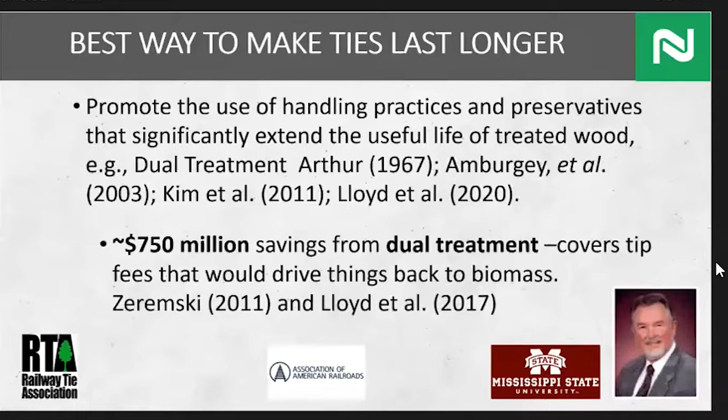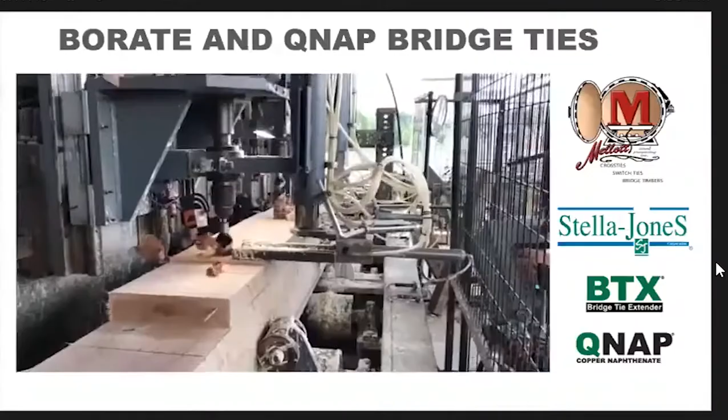And in this process, you can see the commercialization of this BTX program on bridge timbers by Nisus. This work is being done at a Stella Jones plant. So you can see they're drilling the hole in this bridge timber, and it is nominally going to be 1/2 an inch deeper than half of the thickness of the tie. So if you have a 10-inch bridge timber, you're going to drill 5.5 inches deep. You drill the hole, fill that hole with a borate solution, and then cap it.

So in the Boultonization process, the treatment process of this tie, in that last picture that went away a lot faster than the other ones did, all the red that you saw in there, back up for me and go forward again.

So if you take note, I know we're going through this again, if you take note of the red around the holes and the diffusion that has taken place in the Boultonization process of that borate inside that tie due to drilling these holes. Now, we've done numerous studies with University of Tennessee and with Stella Jones and at our plant as well, even on break testing and the strength of these ties after these holes were drilled, and we have not had a

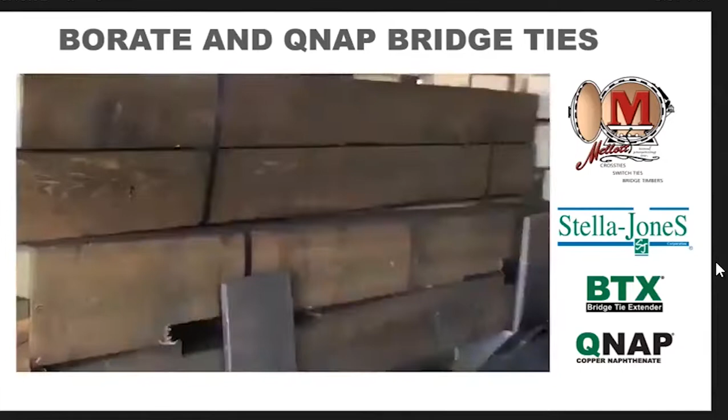problem with it. Then you can see it's going into the cylinder, and these were treated with QNAP here. It's wiped clean. Process is complete. There's the red that I was talking about in a different species of ties. So good diffusion through the Boultonization of doing the treatment through the BTX program that we have commercialized.

Problem with these ties is the dual treatment process was not performed correctly. These ties were extremely green and extremely wet. So they did not allow the penetration, because they were treated too green, for the borate process to go through, nor did it allow the creosote to soak as it was supposed to. And you can see over here, 0.07 pounds per cubic foot for the DOT, the borate, and 0.25 is what it's supposed to be.

So way off the numbers in this, and later on, we'll see some pictures as to what happens when this process takes place and is not, I'm not saying treated correctly, I'm saying that the diffusion was not allowed to take place here.

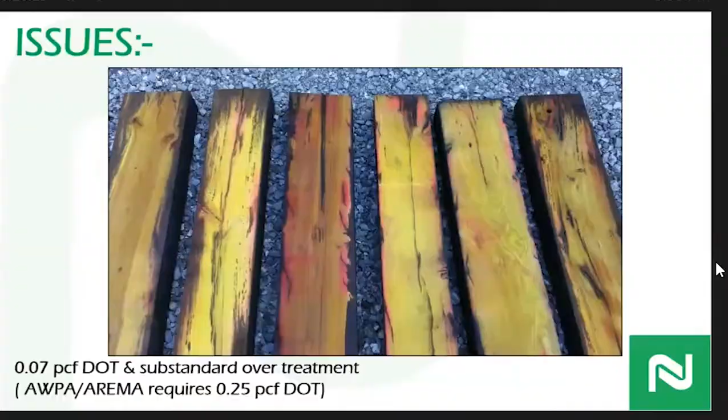And what we were hoping when we commercialized even the BTX program, as well as doing a dual treatment program, is that the railroads would not take a look at this study and say, well, now you're treating the heartwood of these ties. That means we can reduce our retentions on the treatment through the treatment process and the pressure cylinder. And we hope that's not what's going to take place.

We hope that's not what's going to happen, thinking that you're going to save money in that aspect of it, but hoping that through the dual treatment process, you're saving money by those ties lasting much longer through their cycle and not having to take them out as early. So hoping that's the way this is looked at, and that's why we're doing studies like this.

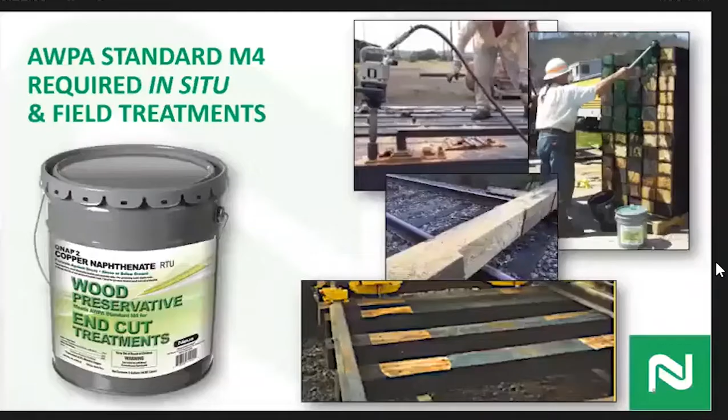In this picture, you'll see this is a product that we manufacture, but it's also approved in the AWPA standards for use in the field. Any cutting, any mechanical damage, any drilling, any adzing, anything that might take place out on the railroad where you've disturbed the treatment of the tie or a bridge timber, then here's an application that should be used, no matter if it's creosote, no matter if it's copper naphthenate. This is what's approved to be used on those ties out in the field.

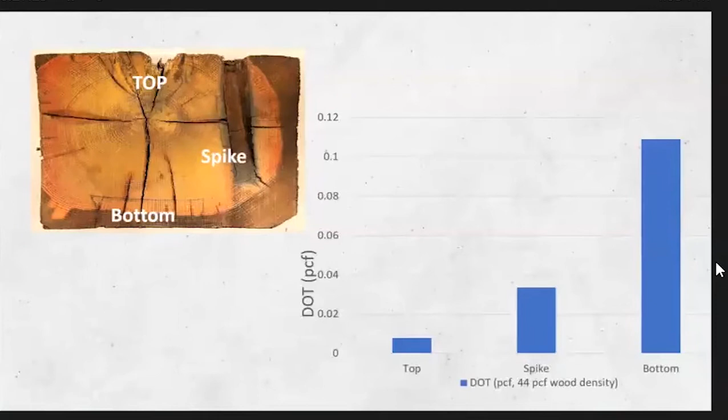There's a little bit of a graph here showing penetration. You can see on the top of the tie here, very little borate. See where the spike was at, you're 0.03, maybe. In the bottom of the tie, you're all the way up here at 0.1. Of course, the standard when initially treated is 0.25.

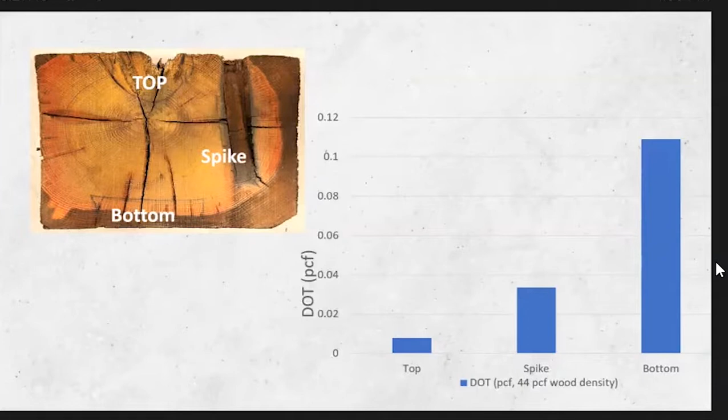End-grain penetration is very important, and that's part of the borate process as well, and the BTX process that I showed you the video of earlier: drilling the holes, putting the DOT borate inside, capping it off, and it goes through the Boultonization process. So end-grain penetration is very important with that process in allowing the longevity of that tie as well.

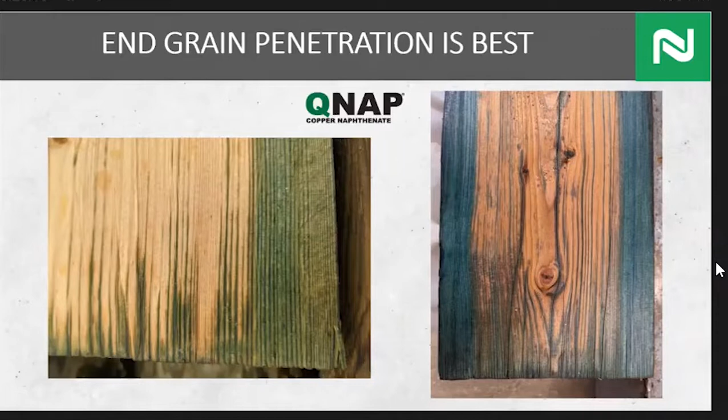This is also Douglas fir, so it's a very highly refractory species. It has big heartwood in it. So that's why we're trying to go through this process, just like I was talking about with the ties, drilling holes into the pole and allowing borate to get inside the heartwood and treat it and diffuse through the heartwood.

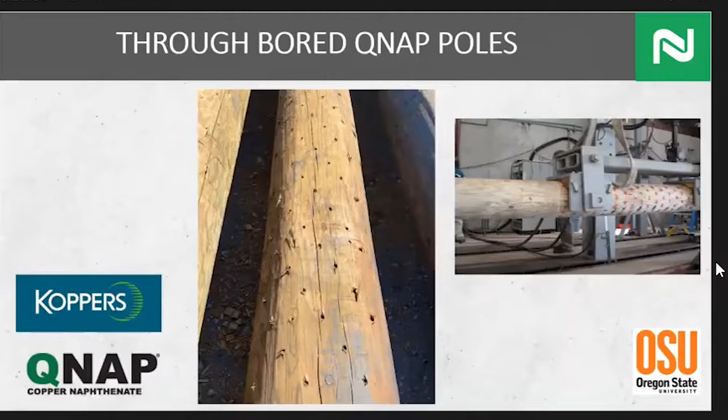One thing that Dr. Jeff Lloyd, who has done a lot of research and performed a lot of studies on this, and has processes going on over in Europe, would like to reintroduce, and wishes that the railroads and treatment plants would reintroduce, is pre-drilling ties.

Because through the studies that he has performed, as well as what's going on in Europe, and in my understanding, I'm just being told this and passing this information to you, we used to do this in the United States, and there are some slides here that I'll show you that can prove that. Through drilling used to take place, which allowed treatment to get into the heartwood of the tie, and we stopped doing that.

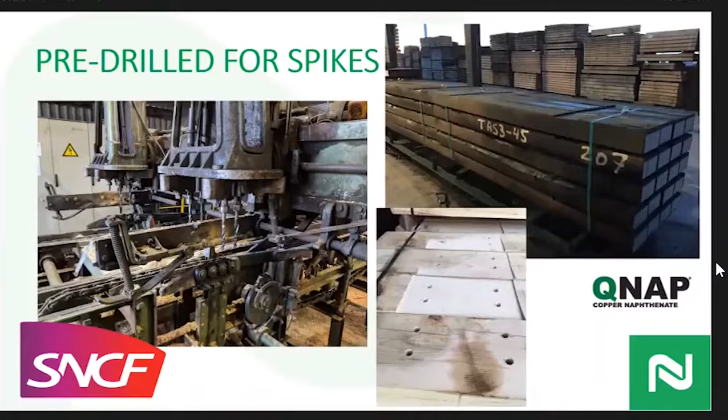There's supposed to be a video on this one. Sorry. How about that? Thank you.

So this is performed in Europe. If you look on the bottom, you see the drill bits down there. They all pop up, through drilling the tie. Then it goes to the treatment process after that. So that's something that we would like to see reintroduced to the tie market in the United States of America through Dr. Jeff Lloyd's research, increasing the longevity of the tie as well.

See in this next picture, this understandably looks like a spike hole. This one might be as well, but all these other holes you see are old ties that have been through drilled. They don't look too bad. I don't know the age of these, Dr. Lloyd may, but I don't see a lot of decay buildup underneath where the tie plate would have been. I don't see much here. Don't really see anything going on over here, but that's what this is from, through drilling.

That one I could argue was probably a spike, but there was also one right here, and that's the reason for fingers kind of pushing the dust around. But those were through drilling. I apologize, hit the wrong button. But it was a good process.

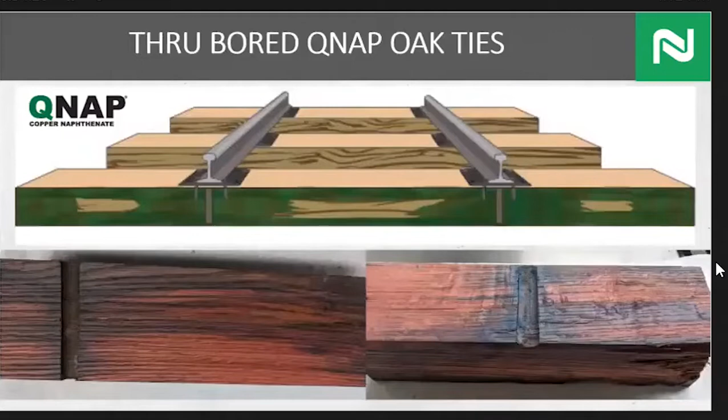So in conclusion, you guys that are with the railroad want to make sure, as well as we do, that 0.25 pounds per cubic foot borate per the AWPA and AREMA standards is what's taking place in the heartwood of the tie to preserve that tie and get that longevity of it. Second thing is you want to make sure that the ties are dried properly. Make sure that air or the drying cycle, as long as they're put up in the air, make sure that moisture content is accurate and what it should be before these ties are treated.

Third thing, you want to treat fully, QNAP or creosote. You see the QNAP spec is 0.06 pounds per cubic foot. And you want to make sure you have 8 pounds of creosote, not 7 pounds, not 6 pounds. We want to make sure that the ties are getting treated correctly. Do your field treatments. I showed you the bucket of ready to use QNAP approved by the AWPA. Any cutting, mechanical damage, drilling, adzing that takes place on that tie, make sure you're putting a surface treatment on it in the field. You'll increase that longevity as well.